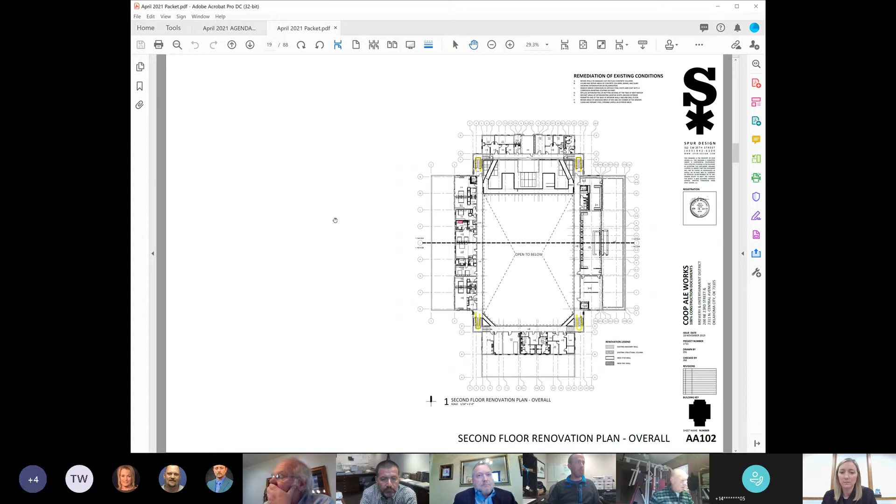Okay, I think that gets my head around how the spaces are utilized. So a general question for the applicants: pull up the smoke control system. Is the smoke control system a requirement for a building with an atrium space?

Yeah, so in short, we initially went down the path of utilizing the deployable protectives to make this so it was only open to 2 floors. So then we wouldn't have to go down the path of a smoke control system per IBC. However, then we started going into the evaluation of enclosing the exits and what that would mean to the historic preservation. Jointly with the architect, we determined that fire modeling and a performance alternative would be a potential to see if we could get that approved by the board to not enclose those. So,

Hey Dom, I have a theoretical question for you. Does the building say that we did not have a third floor? Did the open stairs meet all the requirements to have the open stairs if, say, it was just 2 floors? Is it really the third floor that threw us into the enclosure requirement?

Yes, but also the amount of open stairs that you could have when you're sending 50% internal to the space and how they really exit out of the building. So it's a combination of the two. In short, it's the rating of being the third floor and kind of how those are all interconnected around the perimeter. Okay, but if this was a 2-story building, this would be a completely different conversation, correct? Yes. Yeah, so it's really the third floor that, to me, is of concern.

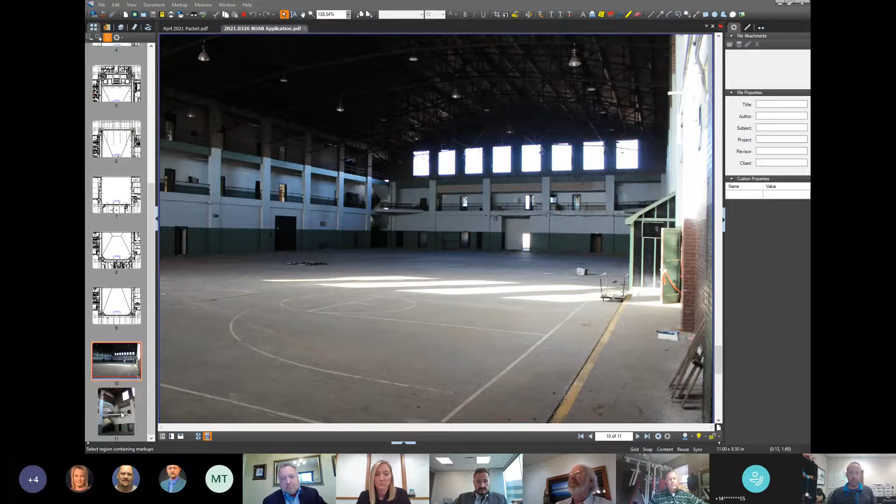And so that's the biggest issue with the Park Service and the SHPO. These tax credits are worth roughly $12 million of a $39 million project, and they're frankly the only thing that makes the entire project financially feasible. So yeah, it's the visual occlusion issue with the Park Service and SHPO standards.

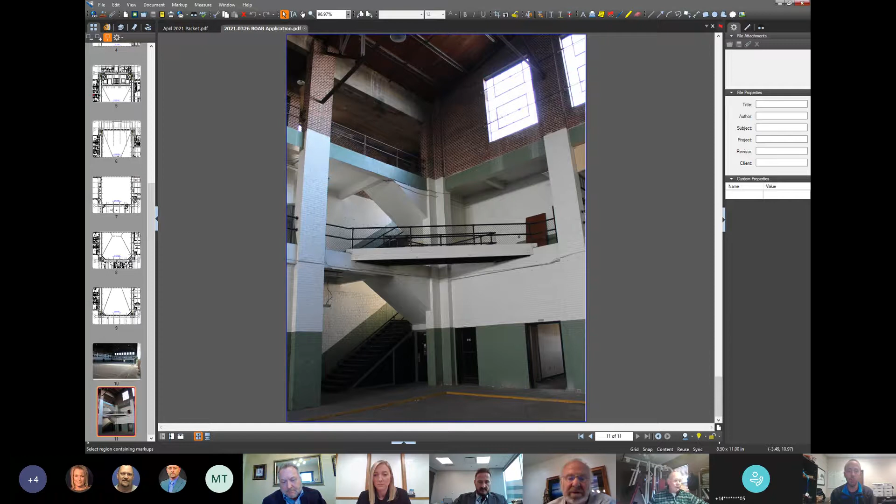Yeah. I can understand your desire to have those tax credits. I can see the project not going with that. I'm just concerned that... Well, we can continue on. I can talk more about that later.

So I'm curious, have you actually filed an application and have they responded to this idea of enclosing 2 of the stairs? We have filed all of the existing documents, but Jennifer, correct me if I'm wrong, the original submissions did not include the glass enclosures because of the initial feedback we got from the Park Service and their basically dictation that not occur, right?

Correct. So you specifically asked them if 2 of the stairs were enclosed, would they not grant you, you couldn't become part of the historic register then? Because right now, if I'm not wrong, it's not on the register, is that correct? It is on the register, and that's effectively what we call a Part 1 application and approval, and Part 2 application is effectively the approval of initial drawings.

Part 1 and Part 2 are both approved, and the way this works is kind of an exchange, whether it's the SHPO initially working on approval and submitting it to the Park Service, or SHPO working with our historic preservation consultants who have dozens of years of experience throughout Oklahoma and nationally. The standard historically around open staircases, the precedent is well established. This kind of exchange and verbal commentary started about 2 years ago with the SHPO and the Park Service, very early in the process, brought up by Historic Preservation and Design Studio, our consultants to the SHPO and the Park Service.

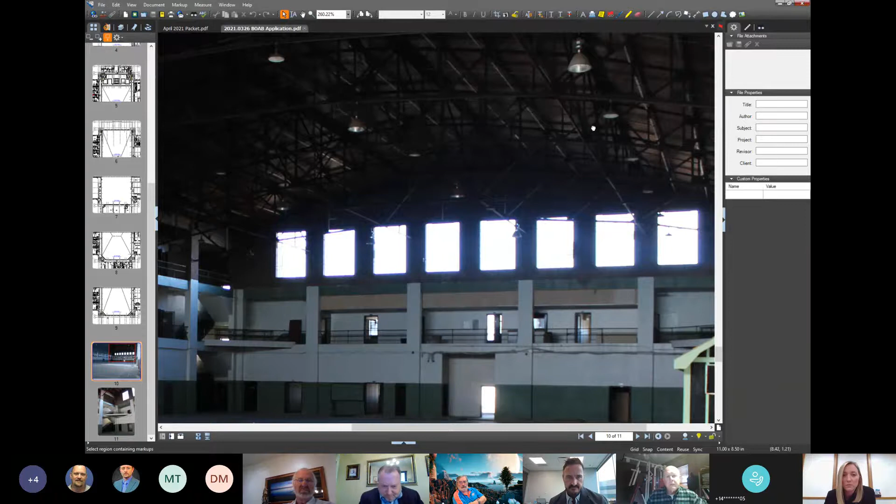There's Mike, Scott, and Tommy. I don't remember the exact requirements, but there is an allowance for wood decking in a roof structure if it's above some height. Is that correct, 22 feet or something? I'm trying to take a look unless Wilson knows. Yeah, it's 20 feet.

But that's above the highest occupied floor, though. Isn't that correct, Mark? Yes. I don't know if this is germane to our argument, it may be compliant being a 5B or whatever it would end up being. Okay, I'm not speaking to that.

I'm just curious. So my second question would be the makeup air. It looks like we're using roll-up doors for all the makeup air, can you confirm that? That is confirmed. What do we utilize those overhead doors for? I didn't get a good feeling for what they're going to be doing with those, as far as the use of the building -- are they pulling trucks in and out of it? What's the use of those overhead doors? Some of those are towards the loading area, so there will be some loading and unloading in that space.

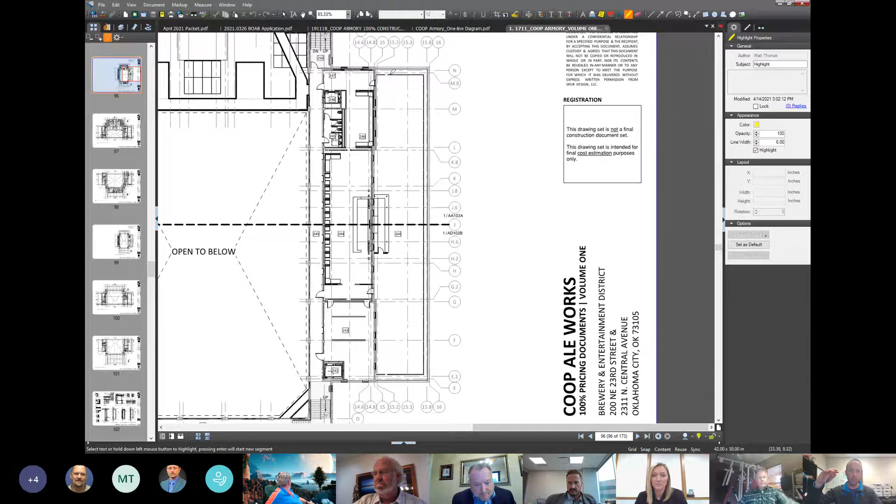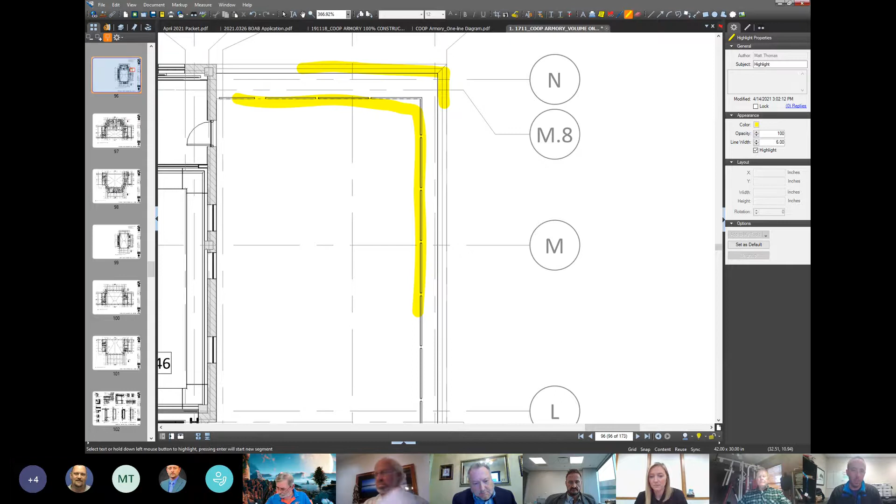But so there were 2 things. One, the doors and the tops of the windows were not visible from across the street. And secondly, we were able to set back what is essentially the railing system, because the parapet on the second floor patio is about 22 to 24 inches. We're lowering the floor a little bit with the roof structure, which really isn't visible anywhere. But that setback of the railing on that yellow line is set back from the parapet such that at its required height - 42 inches for a railing - the top of that railing is not visible from across the street on the other side of Walnut. So those were the 2 big issues that basically allowed us to put the patio on that second floor.

Very ingenious, very good. I was just curious of that because, like I said, I have a lot of empathy for your thoughts on these matters. Sure, thanks.

So Dom, are those shutters or the curtains that are being used on the 3rd floor? Do they provide any fire rating, or were they just smoke? No, those are rated shutters. They're actually shutters, correct - not just some sort of fabric curtain. They're a shutter. It's rated opening protectives for that whole length on both the east and west side.

And again, I'm not trying to play architect here, because I think you have a very good architect on your team. But have you given any consideration to using those shutters, at least for, and perhaps some meeting doors, to enclose the stairs? So the shutters would essentially be hidden until they're operated, and then the meeting doors could be held back and just become part of the wall, still give you the open effect. But is there any possibility of investigating something like that?

I'm looking at this view, let me see if I can zoom in a little bit. This is the stair, I guess this is the northeast stair.

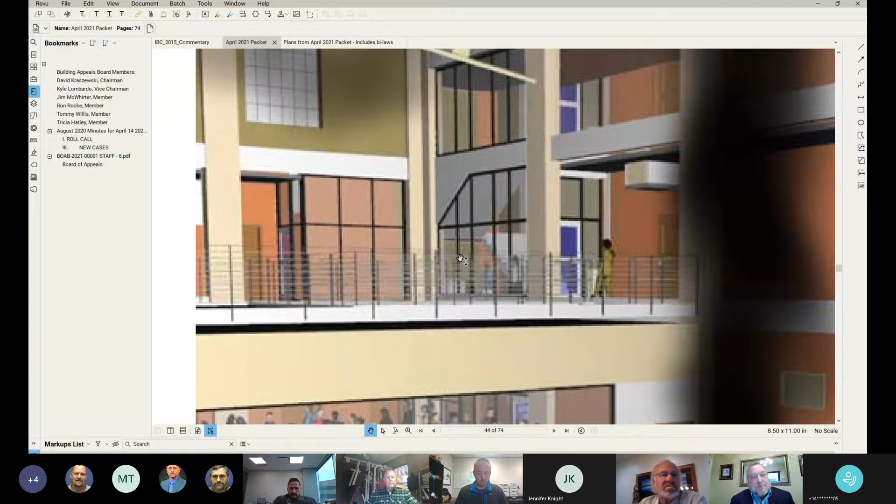I just wonder, is there any way to accommodate, if you don't want to use the glass or you can't use the glass, something that was hidden behind this beam that might effectively do what I would say is my concern, as well as David's, of enclosing that stair somehow. Just an idea.

Jennifer, can you add some about how the shutters were going to be occluded from view behind the existing beams, and why that is different at the stairwells in terms of exposed structure?

Sure, I can. So along the corridors, along the atrium, the beam has a depth that allows for a recess along the corridor. So we've got room for the shutter piece to be kind of tucked away and hidden from view from the atrium.

However, when you get to the stair, essentially the underside of the stair, the formwork that they used turns right into the concrete, like the beam essentially, and comes right back up. So there's no way for us to tuck it up underneath and hide it. I see. Yeah, it's not that we didn't want to pursue those scenarios. We've already pursued them and have found ways that we couldn't get around them.